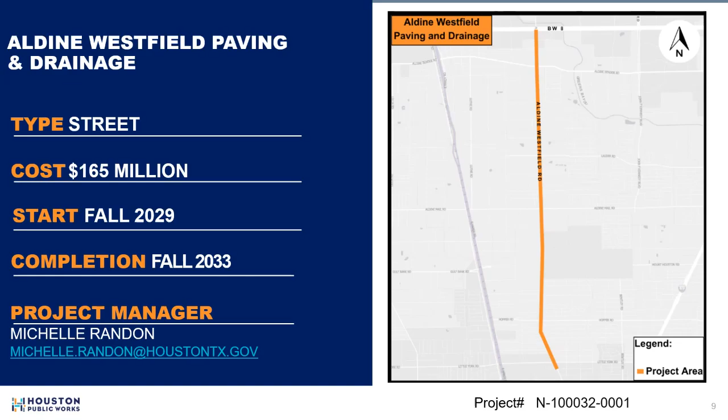Thank you. Good afternoon, everyone. We're going to start off with the project limits and some of the existing conditions of this project. Our project here, to give you some point of reference, is between Little York Road and Beltway 8, the frontage road of Beltway 8. The project limits will start at Pine Tree Drive and would end somewhat around the transition of Beltway 8 past the new improvements that they already have there. We'll be transitioning into those improvements. As you can see here between the yellow and the blue line, this project will be divided up into two design projects.

Design Package 1 will be from Pine Tree Drive to Aldine Mail Route, and Design Package 2 will pick up at a transition out of that intersection into the Beltway 8 transition. We have a lot of major intersections there that will show improvements, and some of the major points of reference are Keith-Wiess Park.

We'll be crossing Halls Bayou, and we'll be talking more about some of the bridge improvements there. And then we also have the crossing of Greens Bayou.

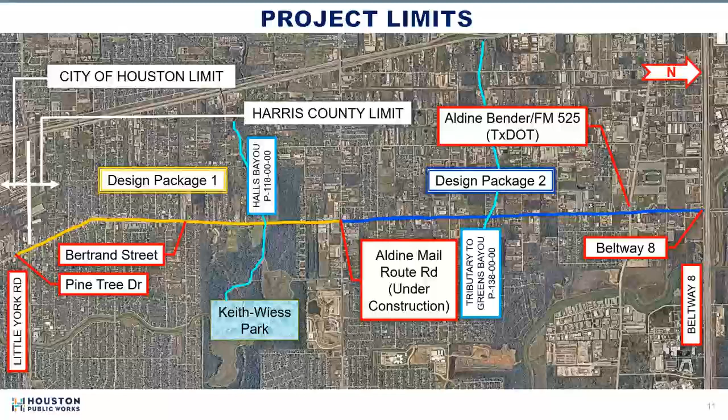Here are the existing conditions in the right-of-way. Currently, you have 2 lanes northbound and southbound with open ditches and a grassy area on each side of the travel lanes. The picture on the right shows you a top view of the current conditions.

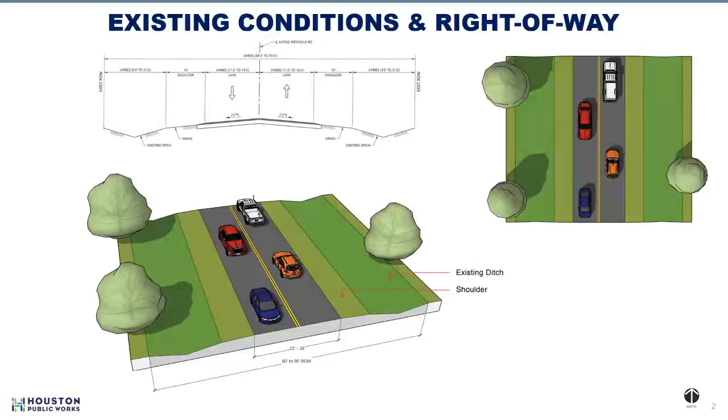In this slide, we wanted to show some of the existing conditions we'll be going in and improving. Here we have several locations of unsafe cross drainage culverts without protection barriers. We will correct that during construction of the project.

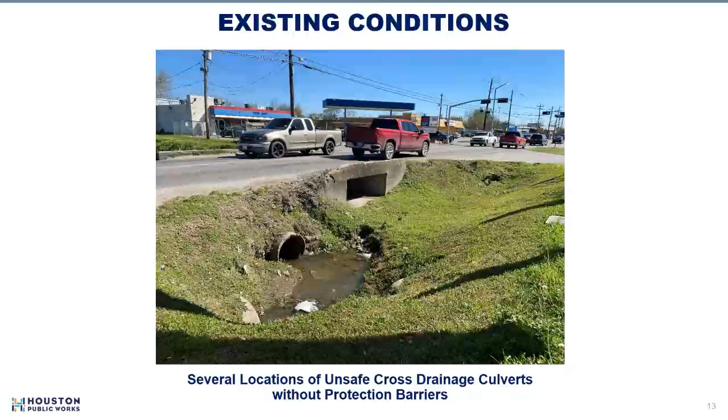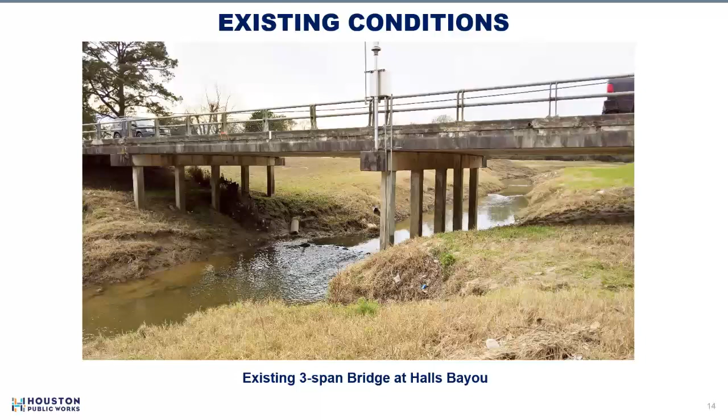On this slide, we wanted to show the existing conditions of a 3-span bridge at Halls Bayou that we will be improving, and we'll go into those improvements in later slides. Here we wanted to show some of the deterioration of the concrete bridge deck and joint cracks. We will correct that during construction because you will be getting new bridges at these crossings.

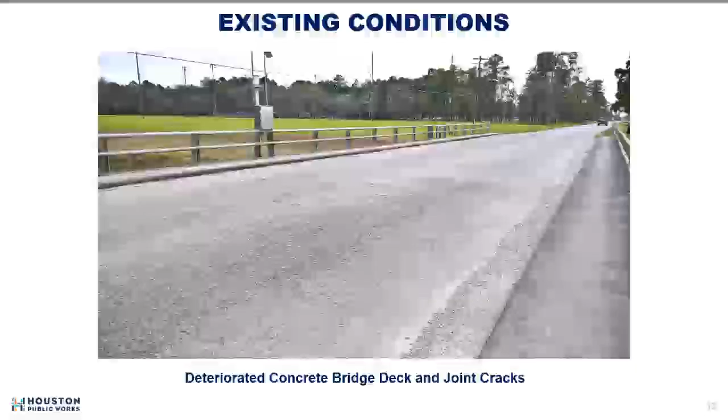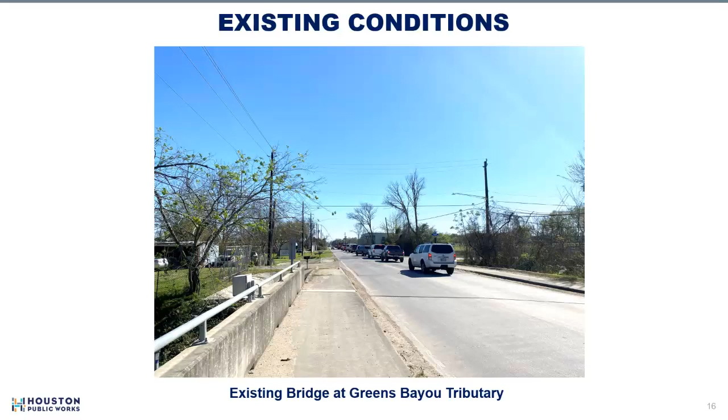And here again it shows a 2-lane bridge over Greens Bayou. We will be improving that with shared use paths and 2 separate bridges, and we'll go into that more as we show you the proposed conditions during construction.

Here I'm going to turn it over to one of our project team members. Craig, will you take the summary of the proposed improvements? Thank you, Michelle. So here's the summary of the proposed improvements for this project.

We're going to be removing the existing 2-lane asphalt road and replacing it with a 4-lane boulevard curb and gutter roadway on Aldine Westfield from the Beltway to Pine Tree Drive. We're going to be providing underground storm sewer systems and detention ponds. We're going to reconstruct bridges at 2 locations to the latest standards.

We're going to provide shared use paths on both sides of Aldine Westfield with ADA compliant wheelchair ramps at all major intersections. We're going to provide high visibility crosswalks at intersections for pedestrian and bicycle traffic safety. We're going to update traffic signals to include pedestrian signals. We're going to provide landscape and streetscape improvements, and new and upgraded street lights.

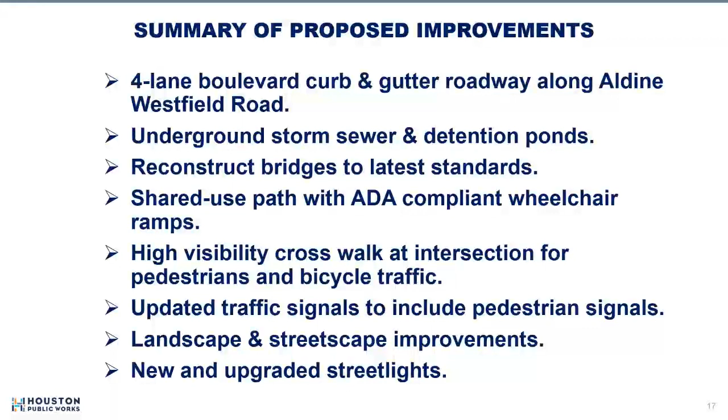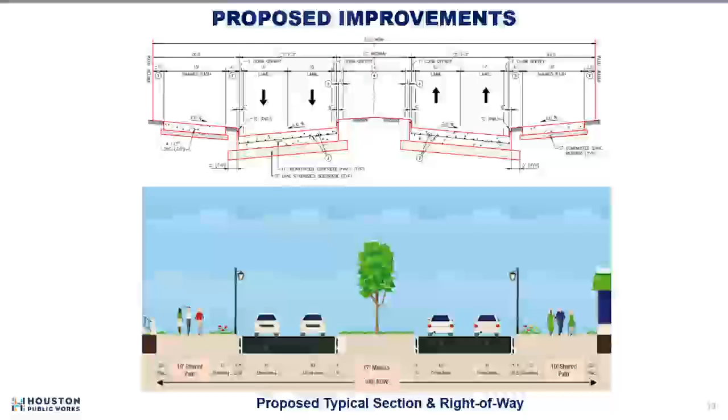Next slide. All right.

First, we will be increasing from 1 lane in each direction to 2 lanes in each direction. We are also looking to provide left turn lanes in both directions of Aldine Westfield for traffic wanting to turn onto Lauder Road. Second, the proposed 10-foot wide shared use path will be provided on both sides of Aldine Westfield in front of the school on both sides of the intersection.

The Lauder intersection currently does not have crosswalks to allow pedestrians and bicyclists to cross Aldine Westfield safely. As part of the proposed improvements, our objective is to provide proper crosswalks at all signalized intersections within the Aldine Westfield project limits. In addition to providing sidewalks, ramps, and crosswalks at each intersection, our goal is to provide continuous sidewalks from Beltway 8 to Pine Tree Drive.

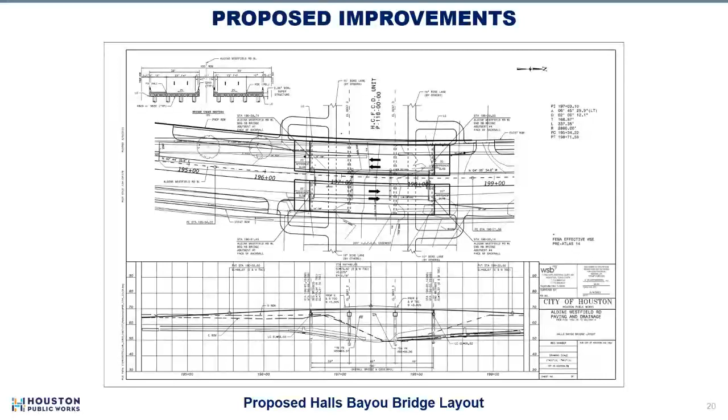This slide shows the proposed bridge layout over Halls Bayou. Our plan is to remove the single bridge and replace it with two separate bridges. Our goal is to raise the bridge over Halls Bayou, and our second goal is to have continuous shared use paths that will continue across the new bridges. We will also consider future ramps from the Aldine Westfield shared use paths that could possibly connect to future trails under the bridge. In the upper left-hand corner is the proposed bridge typical section.

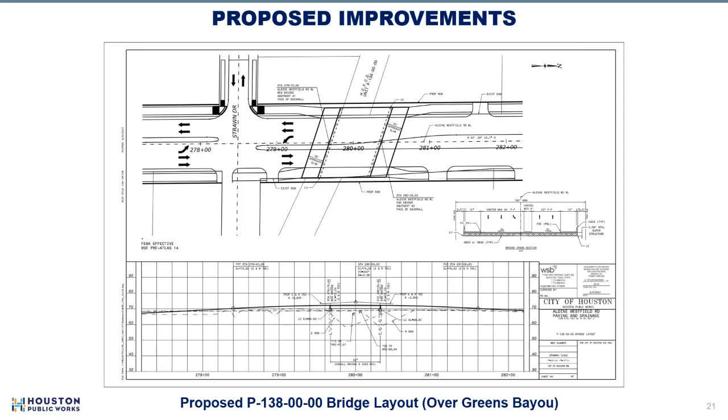This slide shows the proposed bridge layout over Harris County Flood Control District Ditch P138. Our plan is to remove the existing bridge and replace it with a new bridge to have two vehicular lanes in each direction. Our second objective is to raise the bridge over the bayou. We plan to have new 10-foot wide shared use paths across the bridge connecting to the continuous shared use paths on either side of the new bridge. We'll also be adding dedicated left turn lanes at the Strawn Drive intersection. On the right-hand side of the slide is the proposed bridge typical section.

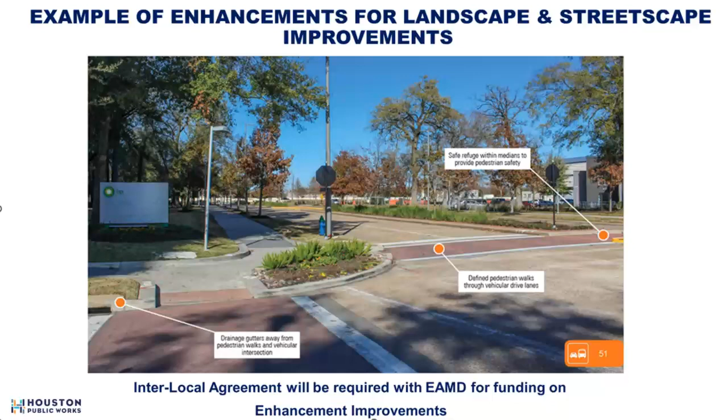And now we'll turn it over to our engagement team.

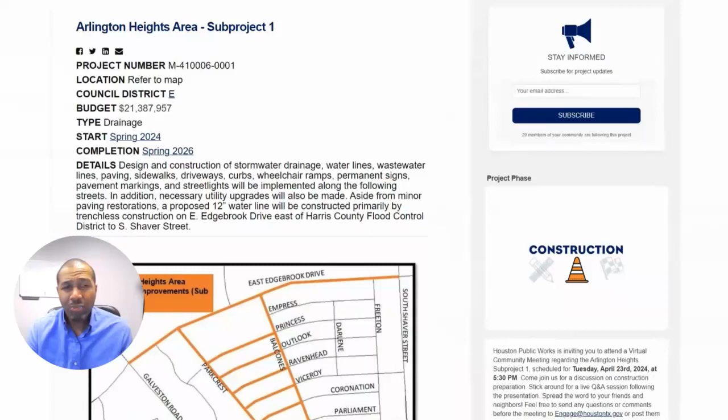Navigate through a labyrinth of impacted streets if you should dare. Join us at the live meeting for a first-hand glimpse into the project details.

For deeper knowledge, an assortment of digital documents awaits, from PowerPoint presentations to traffic control plans, immerse yourself in the project's every facet. Visit the FAQ section for project team contact information.